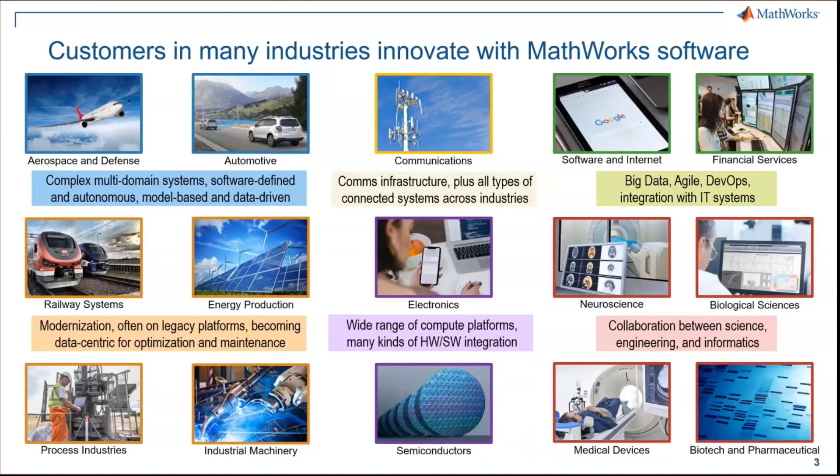At MathWorks, we have a lot of experience helping customers derive business value from innovations in engineering and science, and this allows us to share insights, best practices, and trends with customers across many industries. For example, reducing carbon emissions is driving innovation in various industries, and it's a key focus of the energy industries as well. Companies are challenged to conform to regulatory and competitive pressures while achieving both top line and bottom line growth, and it's a challenge the oil and gas industry recognizes as well.

So that's a high level challenge. But what about the challenges at an operational level, or at a plant level, or at an engineering level?

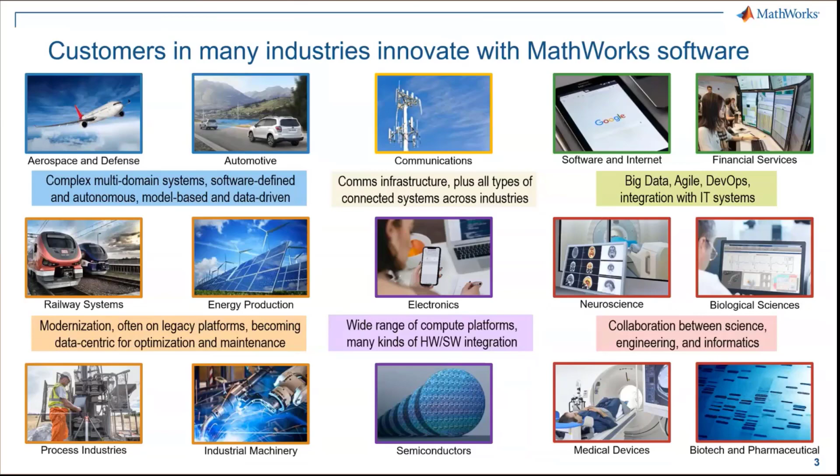That's where digital twins come in. With digital twins, the promise is you can make your operational system smart and connected, and with operational data, you can inform operations to do things better. These are all possible, and things being done today. The applications and benefits you hear of digital twins are things like granting visibility into operations, allowing predictive maintenance, simulating various scenarios, doing what-if studies, and optimizing your operations.

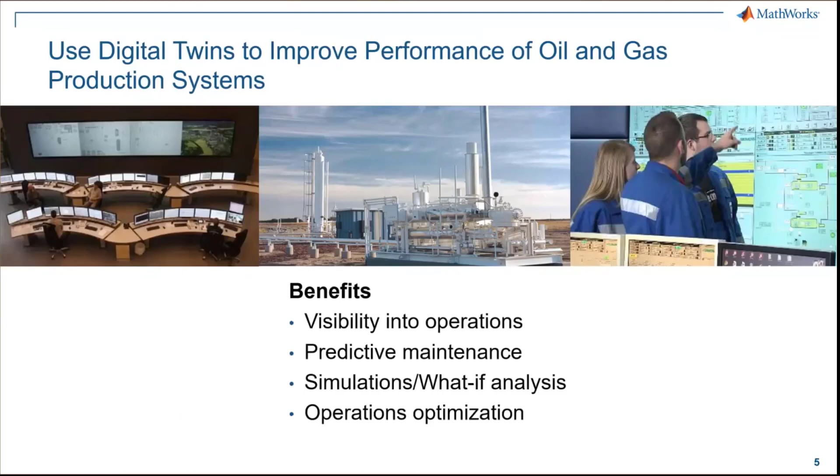Here's an example of one such production process or plant process. It's common to have traces of plant output, like sensors, at sensor locations throughout the plant, but leveraging that information to understand the overall process can be a bit challenging. This is where statistical approaches like principal component analysis, or more recent AI-based techniques, have come in. They allow you to better understand the plant, better understand the context, and analyze system level KPIs. These approaches are well suited to address things like a drift in the process and identify good batches versus bad batches.

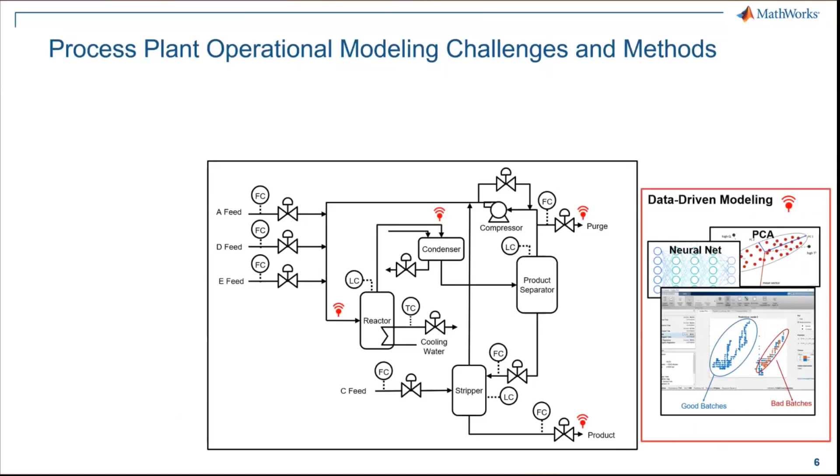At the same time, you also have unit level operations that can be modeled with first principles and the laws of physics. These can be modeled with concepts like energy or mass balance, and are often modeled with process simulators. And now these can begin to be combined to model the overall system process. The more powerful approach is being able to combine both these techniques to get virtual representations of the complete process and how it impacts the KPIs. So let's talk about how these models can be used for the overall benefit.

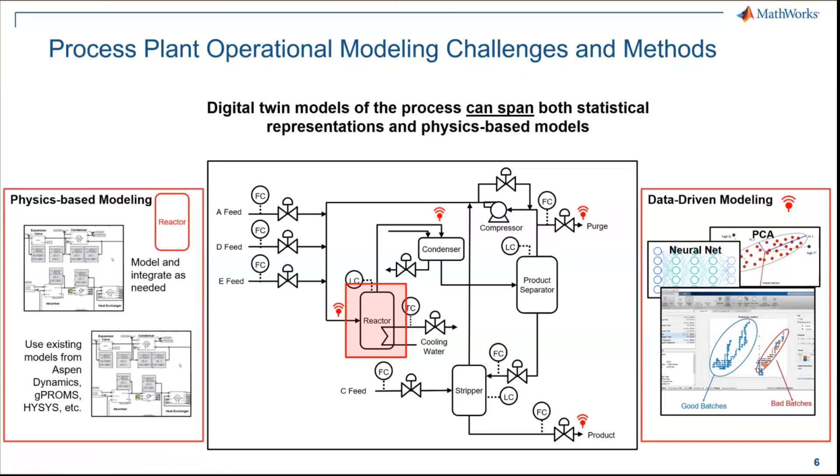And that will come in the later part of the presentation. But how do you go about building these digital twins?

For instance, for system operators, they have control on how the system resources are used, and they're able to see operational data coming off of the system. This data is the first thing that can be used to model what is deemed useful. If appropriate, then physical domains and conservation laws can be applied, and this can be augmented to create other digital twin models. In general, these can be combined to create hybrid digital twins of the process.

Like how a system is a mixture of components, that's how models are also created. They're a mixture of physics-based techniques and data-driven techniques. Overall domain knowledge is useful to make sure that the right models are created and brought together.

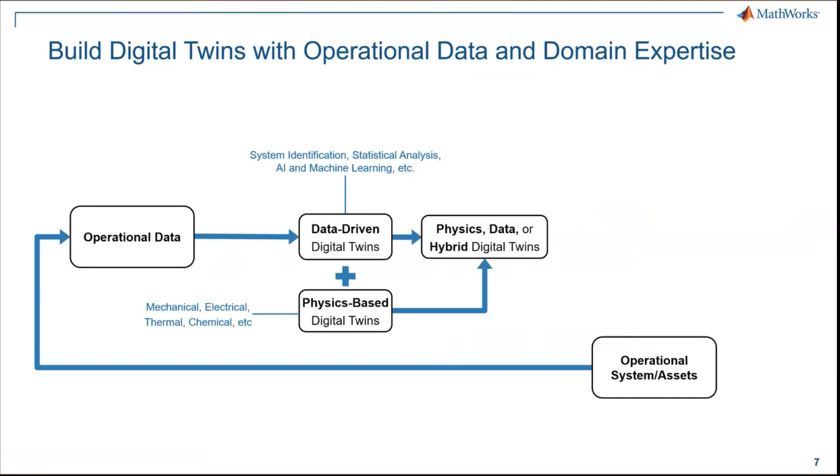And then once it is modeled, it needs to be eventually deployed or acted upon. The ultimate goal is things like operations optimization or predictive maintenance and fault detection and diagnostics.

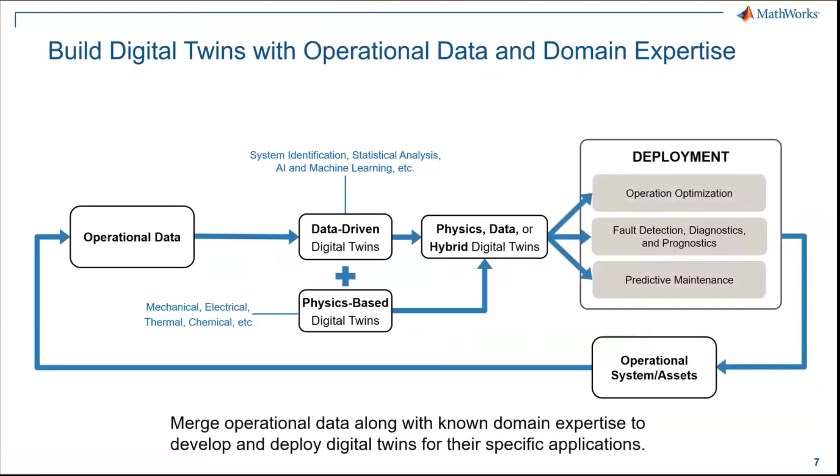MathWorks has existing customers and lots of customers that have used these digital twins, and these span multiple applications, multiple industries, and effectively these are various ways to get models in different levels of the system hierarchy.

And with that, let's get into the case study for today. Today's demo is actually inspired by one of our customers. RAG Austria is a European gas storage operator.

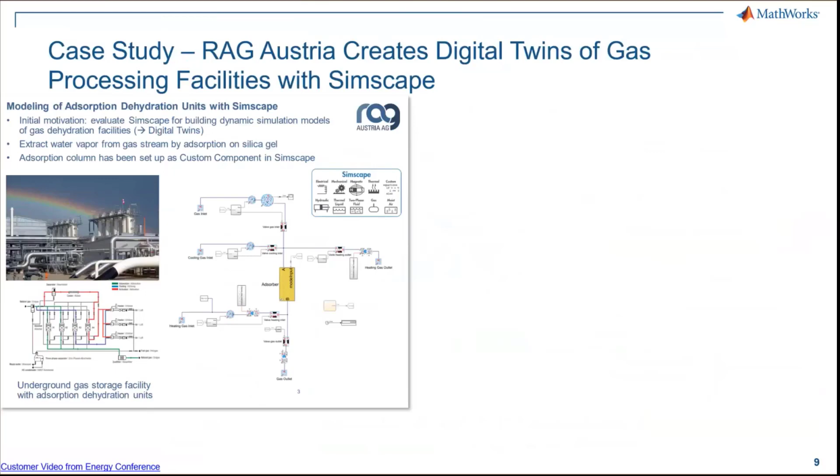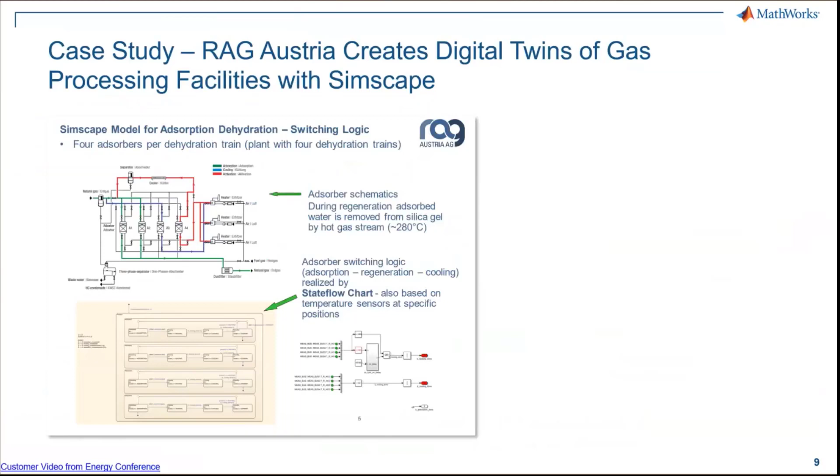They spoke at the MATLAB Energy conference last year about their project to build a digital twin of their adsorption dehydration units in Simscape. If you know adsorbers, then they have somewhat tricky control logic and supervisory control logic, which they were able to simulate in Stateflow. They compared this with plant data and optimized the plant accordingly, and that's how they created the digital twin.

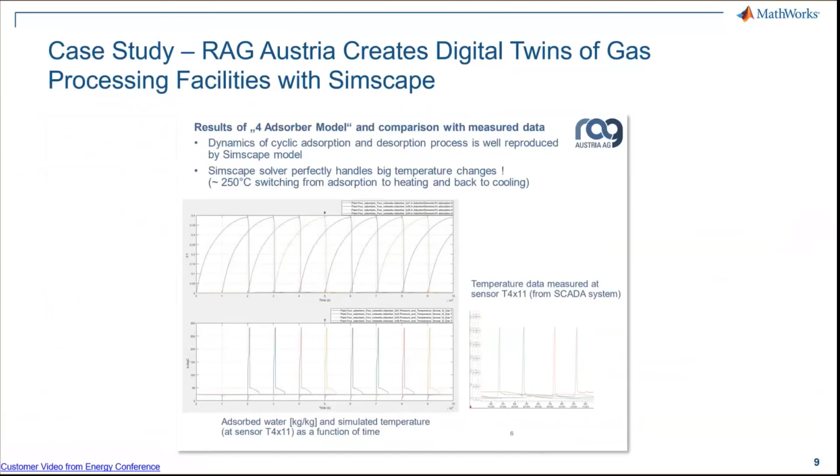They saw that solvers in Simscape were able to handle big changes in input parameters during the simulation. Then once the digital twin was created, it was used for simulations and studying the impact of various scenarios, like some of the ones that you see here.

Ultimately, the reason why they went with Simscape for this was the reasons outlined here: effectively being able to build custom unit operations, libraries, and solvers, and various optimization capabilities.

With that, I'll transfer it over to Eva, who will take a deep dive into what Simscape is and how you can use it to create digital twins of your process, and will walk you through the demo itself.

So what Samvid introduced was sort of the case study we did, which is also what the RAG project was based on. We initially did sort of a proof of concept for them, and some of the work will be presented here. It's not specific to the customer, but a more general proof of concept of how we implemented adsorption equations, combined it with our Simscape libraries to build a digital twin of this application, but this could apply to similar applications as well.

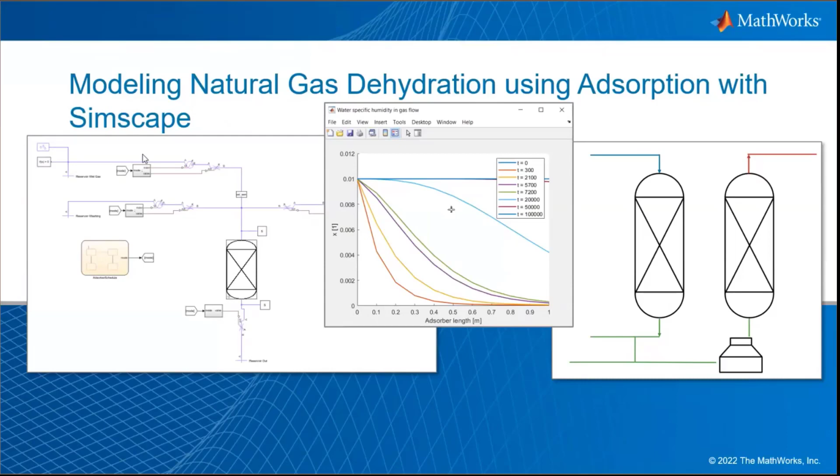As Samvid already introduced, this was done using existing Simscape libraries plus some customized components and customized libraries for the adsorption process. So in the next 20 to 30 minutes or so, I'd like to give an overview of what we did and how this can be achieved using Simscape and some additional tools.

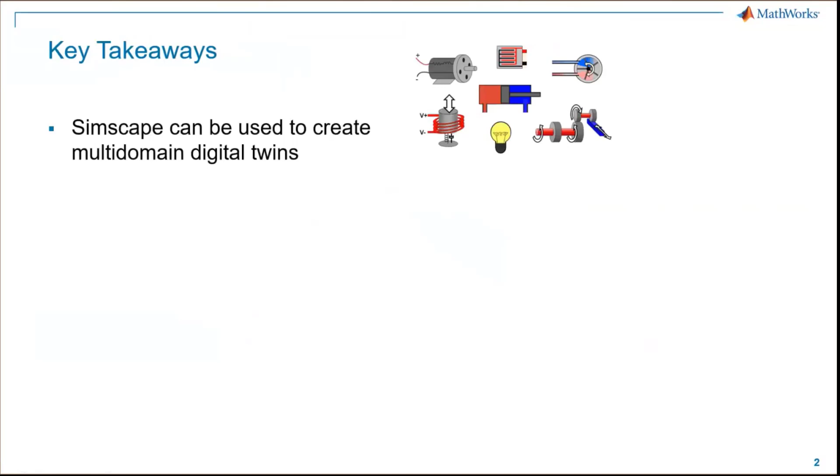First of all, how Simscape overall can be used to create multi-domain digital twins or multi-domain models. How modeling plant and controller, or plant and switching logic in this case, in one single environment enables things like system level optimization, how you can calibrate models using measurement data, for example doing a parameter estimation study, and that it integrates well with MATLAB and Simulink, for example for getting data into the model, for post-processing via MATLAB, and Simulink, for example, for control design tasks.

So the demonstration for today is this model. It has sort of a similar look as you just saw in the screenshots with Samvid, but again this is a proof of concept of how this can be done. So this model—I'm actually going to switch to MATLAB for that, so you can have a first look at the model. Here you can see the same model within MATLAB.

I already ran the model just before this meeting. It takes 2 minutes or so to run. The cycle I ran through is something like a couple of days, which again takes about 2 or 3 minutes to run. So I already ran it.

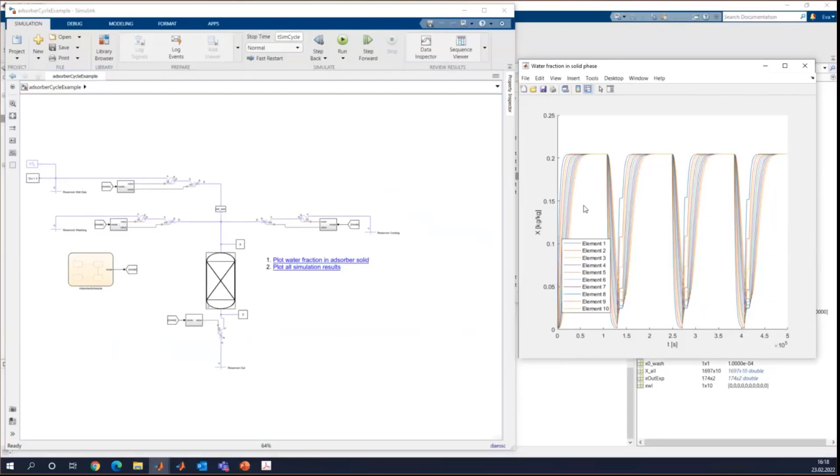And what we can see here in the results plot is the loading of the silica beads in the adsorption column for different elements. Different elements here refer to different elements in the column. Underneath the hood, and we'll look into that later, this is discretized along the column length or height—discretized into 10 different elements. So we can see the spatial distribution as well as the time distribution.

So when we read here from element 1 to 10, the first line on top—we can maybe zoom in here a little bit.

So if we zoom in here, we can see from element 1 to element 10. In this case, it reads in the model from top to bottom. And zoom out again so we can see the whole view.

What we also see is that it cycles through different processes, drawing from different reservoirs. In the beginning, I'm trying to dehydrate the wet gas coming in. And once the silica beads are saturated, I'm switching to a regenerating mode, using hot gas to regenerate the adsorption column so it can be prepared for the dehydration process again.

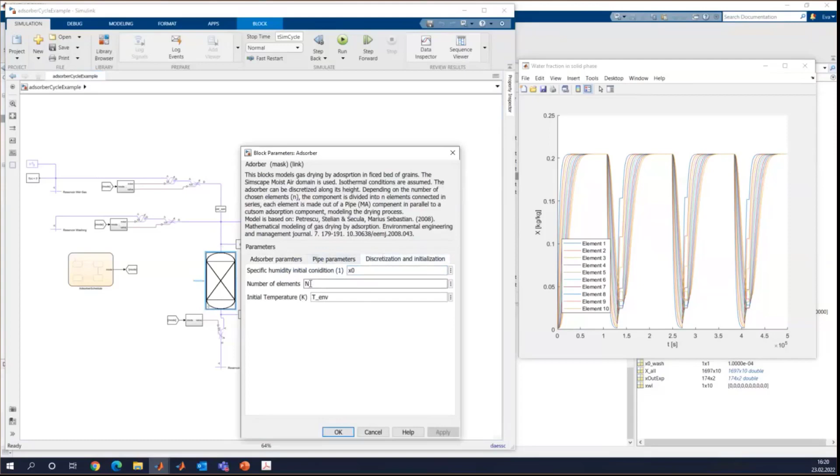And if I take a first look underneath the hood here, if I look at the adsorber column, I can already see I can provide some adsorber parameters, some discretization. Right now I'm using 10 elements, initial condition, temperature, and specific humidity as an initial condition. And from there, it starts to go through the process.

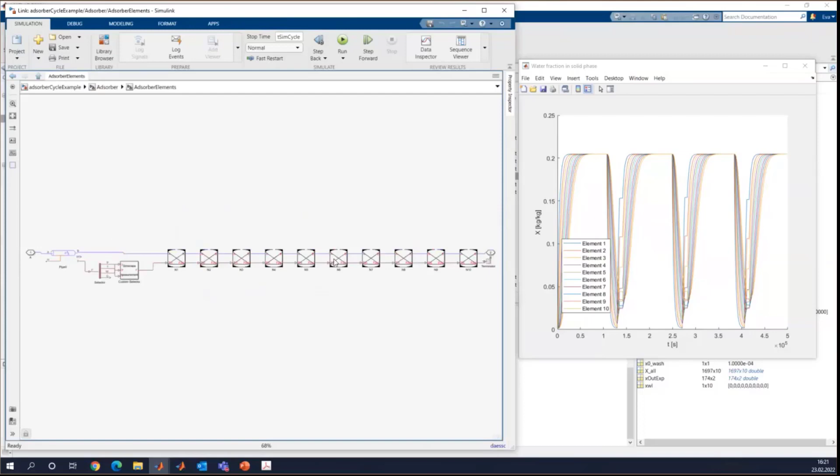And underneath the hood here, again more detail later, we'll see this has been divided up into, in this case, 10 different elements along the length of the adsorber, which perform the simulation, or inside those we can find the mathematical models for the adsorption process.

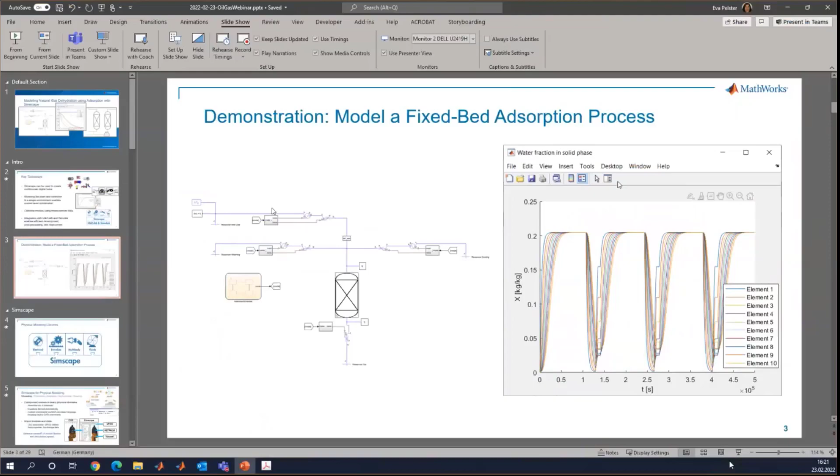But before I get back into detail here, I'm switching back to the presentation for a couple of minutes. So as already mentioned, this has been done using Simscape.

Simscape itself, for those of you who are not familiar with it, is a 1D physical modeling tool that is based on Simulink. By based, I mean you work within the Simulink environment and have additional libraries and technology, like solver technology, for example, for physical modeling. And it consists of a sort of foundation library, which is what we used here, plus custom components. There are optional add-on components used, for example, for electrical modeling, but also fluids modeling.

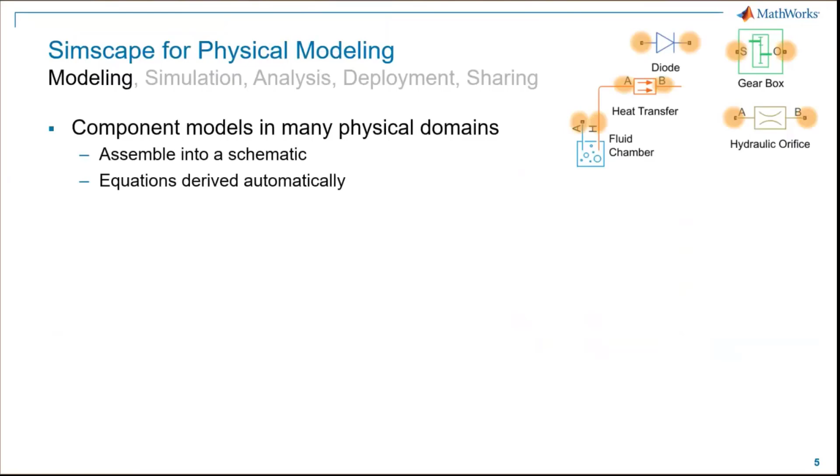And Simscape itself, if I go through a couple of slides right here, provides a sort of modeling style or modeling language that allows for acausal modeling. So what you will see here, you can see this couple of components right here.

You have blocks that represent physical components. They are not input-output based as Simulink components would be. So you don't directly implement the equations describing the system. You use components that ship with Simscape that can be parameterized. And this will be important later on because we used it for modeling the adsorption process.

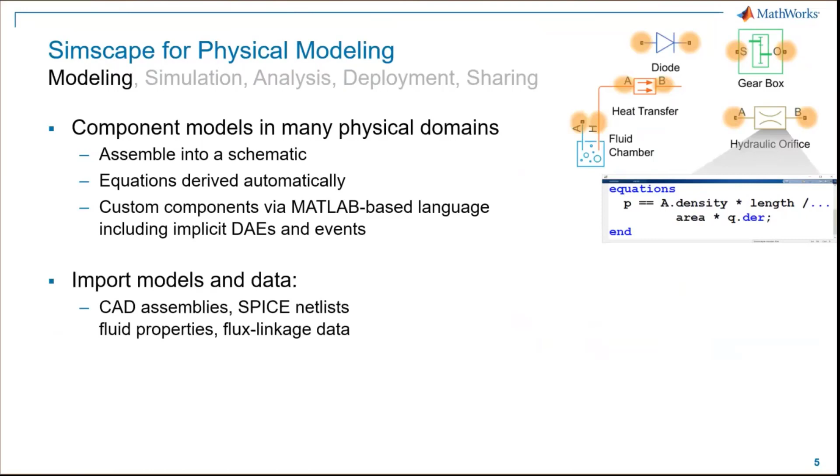We can create custom components via the Simscape language that allows me to create new components within the Simscape framework. And this is also something that will be important to us.

We can import different kinds of models depending on what domain you are in. So it could be, if you do multi-body modeling, importing CAD data, or, which will be more important for us, using databases like REFPROP to import fluid property data.

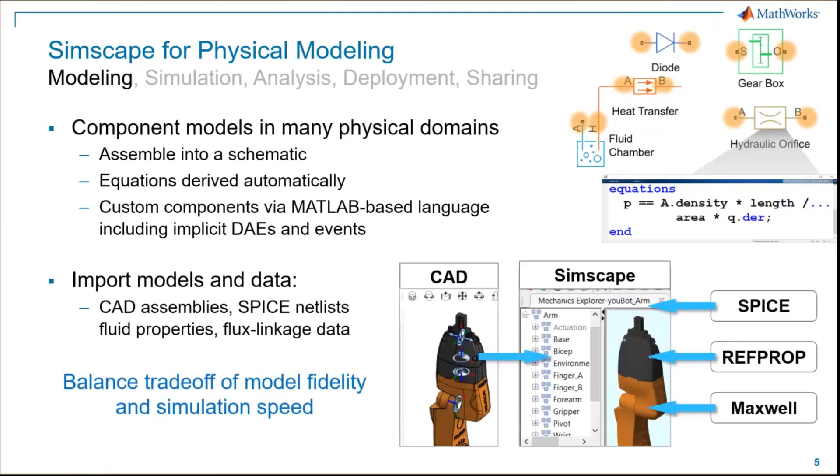In terms of simulation, I mentioned it builds on top of Simulink, but underneath the hood, we'll see more once I get back to the demonstration. The components themselves have equations already implemented, plus every domain, once I set up a physical network, has network equations that are being constructed in the background. So I don't have to take care of that. I have to take care of the components, how they're connected, and their parameterization.

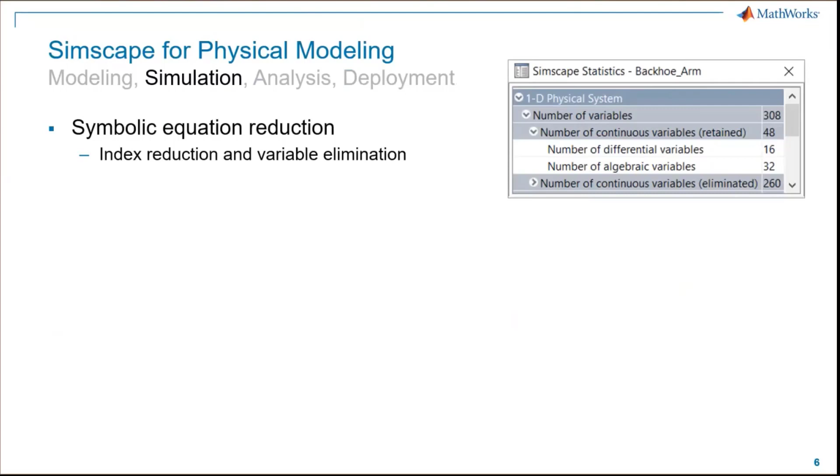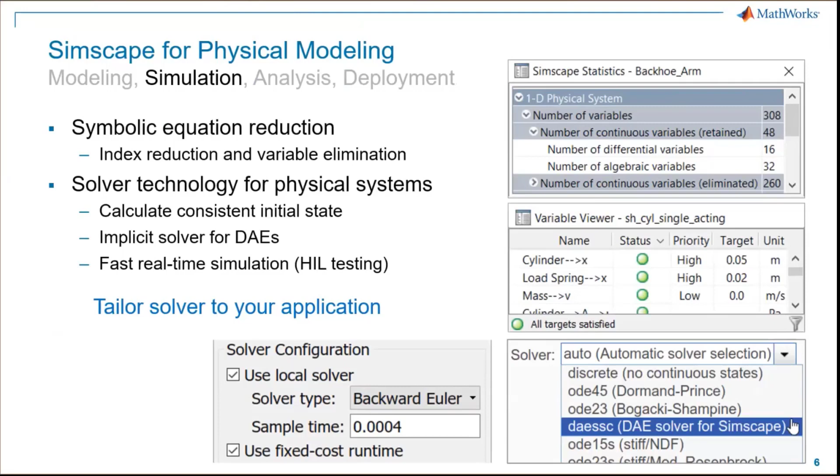So behind the scenes, once I hit run, what happens is a type of symbolic equation reduction. There will be some retained variables that the solver technology, which is kind of an add-on solver to the Simulink solver, will solve. And there are advanced settings on top of that, depending if you're using a fixed step or variable step solver, that you can set specifically for Simscape.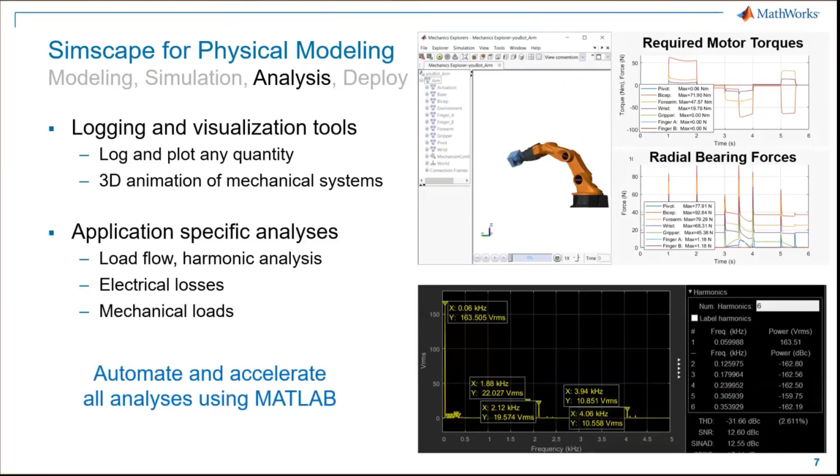And analysis tools, for those of you who use MATLAB and Simulink, some might already be familiar to you. There are specific tools like the one we see right here, which is multi-body animation. If you do multi-body modeling, there are specific Simscape logging possibilities or additional logging options we can take. And some specific tools, but you can always use MATLAB and Simulink capabilities that are also available, especially for post-processing or pre-processing.

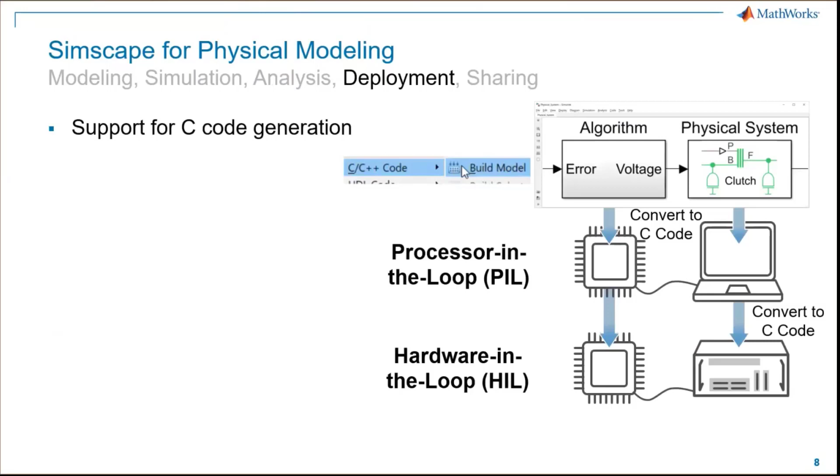In terms of deployment, there are some similarities to what you might be familiar with if you're a Simulink user. We do support C code generation for Simscape networks or Simscape components, which becomes specifically important for hardware-in-the-loop simulations. So if you don't have the actual physical prototype because it's not there yet, or it might be too expensive or too dangerous to test, you can deploy your system or physical network on real-time hardware and perform a hardware-in-the-loop simulation. This is one application where C code generation from Simscape might come in handy.

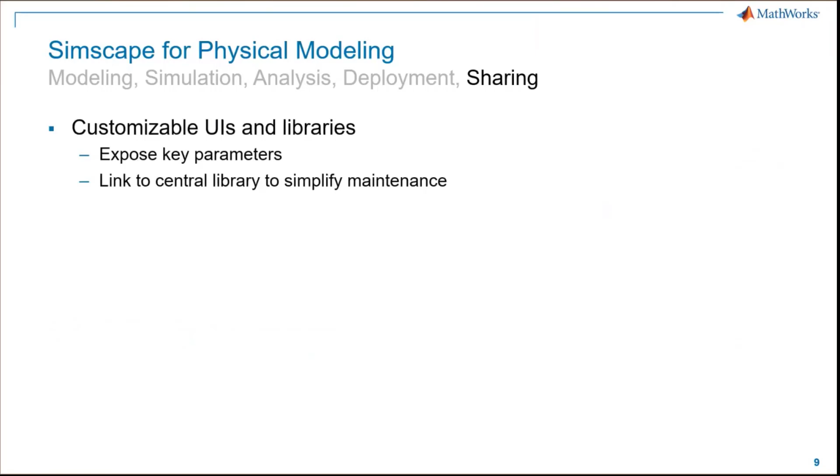This typically exposes just parameters you might want users to change, without really changing the structure of the component or of the model. And if you want to go one step further, you can use model protection to pass along a protected model, to avoid others making changes or being able to look underneath the component, for example if you want to protect your IP.

Finally, there's a so-called sharing mode, meaning if you use Simscape add-ons like Simscape Fluids or Simscape Electrical, you should be able to share the models with other Simscape users even if they don't have access to Simscape Fluids. So you might have one developer who creates an advanced Simscape model using add-on libraries, and others who are only model users, integrating them for simulation purposes and changing a couple of parameters.

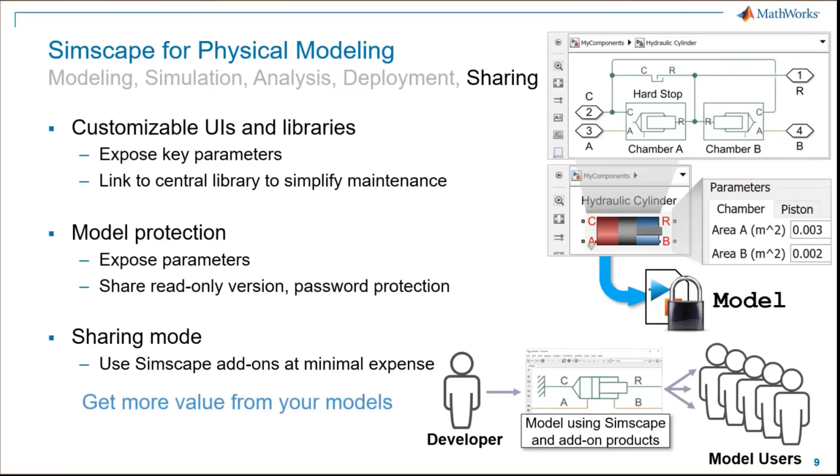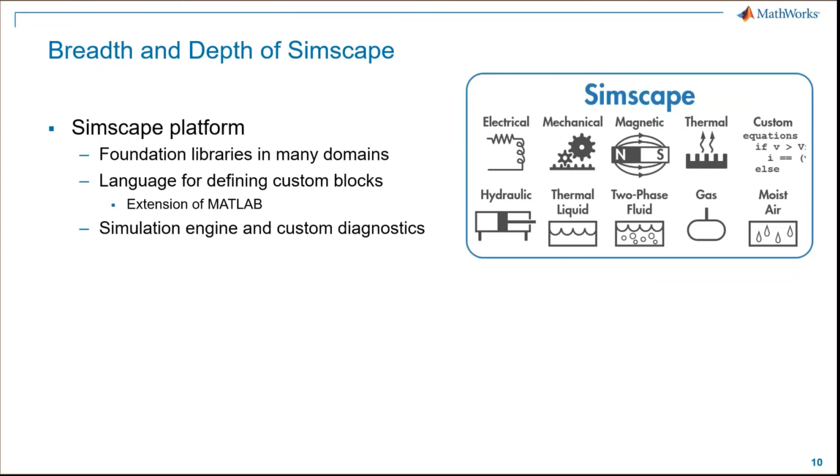As long as they don't change anything structurally about the model, they can reuse it. Okay, so to wrap this part up, the Simscape platform itself has a foundation library. I'll get back to the demonstration in a minute. There's a variety of domains in there - you can see them on the right-hand side, like electrical, moist air, thermal domain, with the capability of creating your own custom blocks. On top of that, we have add-on libraries, which typically extend the library by dozens of components, usually more advanced or more complex, but they support the entire workflow we've just seen as well.

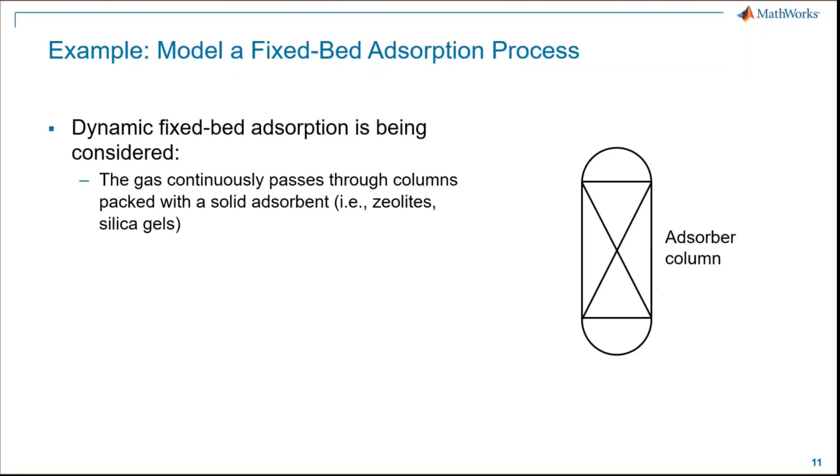So going back to our example, we started creating this model maybe around two years ago, and the question was, can we model fixed bed adsorption using the existing Simscape libraries? So what we want to look at is dynamic fixed bed adsorption - we have a wet gas continuously passing through columns packed with an adsorbent, like silica gels or zeolites.

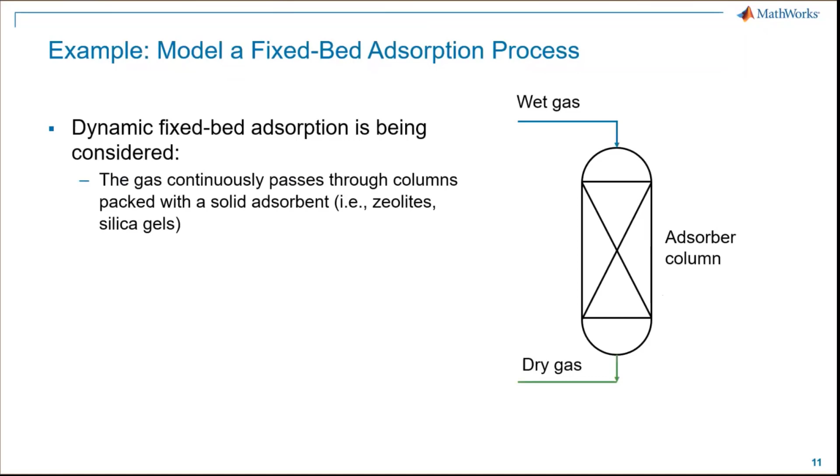Which should dry or dehydrate the wet gas, so ideally at the end of it we have dry gas coming out. And to enhance this, what typically happens at some point is the adsorbent will saturate, meaning the adsorption columns will switch into a regenerating or heating mode to wash out the solids and make them available for dehydration again. So we have something, as we just saw in the example, that can be continuously cycled through, commanded by some scheduling logic, for example in Stateflow.

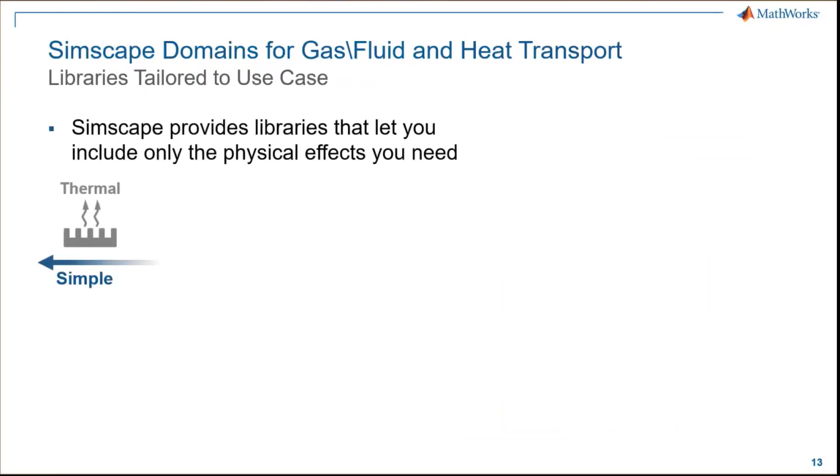So that was the question at hand, and what we had available were some existing libraries and some existing domains we could use. So if we think about what libraries are available that account for gas, fluid transport, and heat transport, there are a couple available in the foundation library. This is sorted from left to right, from simple to more complex - more complex typically meaning more effects are being considered, but also probably more equations will be created once I hit run.

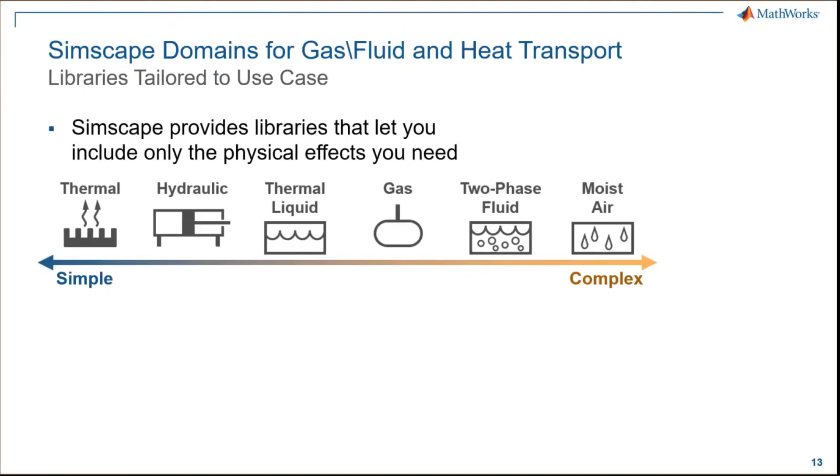The thermal domain typically doesn't consider gas and fluid transport - just, unless you customize it, a constant heat transfer coefficient. Then we have the thermal liquid domain, which adds thermal effects. We can model a gas domain, two-phase fluid, and for a couple of releases now we've also had the moist air domain. Technically, there are always options to create a customized domain, which is what we did in the end, or what the case study somewhat presented. But for the present example, we are actually using foundation library capabilities.

So what we considered using, or what the questions were, we need a domain that accounts for a non-isothermal gas flow that can track humidity and maybe optionally track another trace gas present in the natural gas we want to dry. So what we used in this context was the moist air domain.

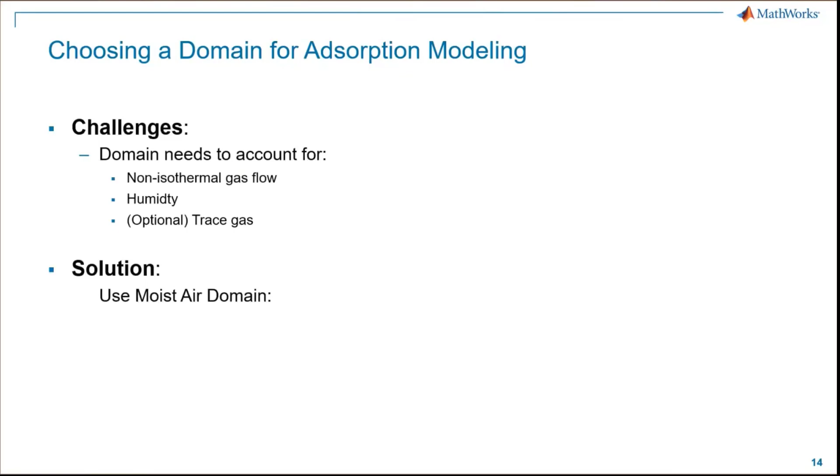The moist air domain comes with regular Simscape, with Simscape Foundation library. It accounts for dry air, so it has up to three components: dry air, which is what we took as the natural gas component, water vapor, and an optional trace gas component as well, which we didn't use here.

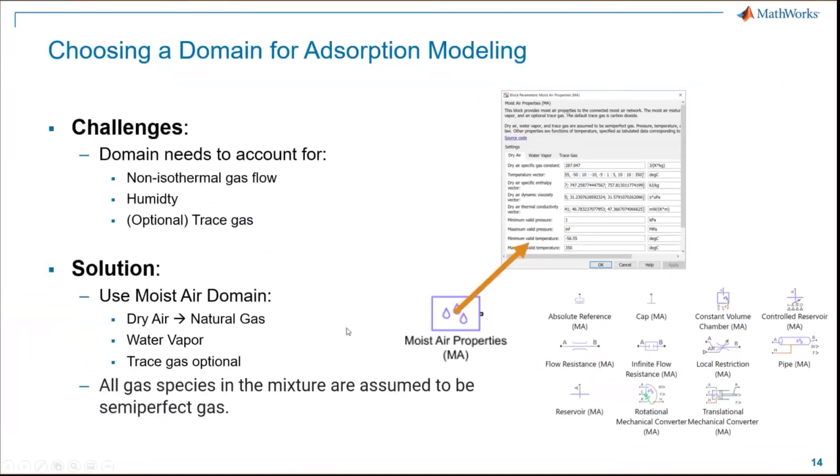So going back to the model, I'm switching back to a different version of the model. This is the version that cycles through, so we have a Stateflow component here that cycles through the different modes: drying, regenerating, cooling, standby, and then drying again.

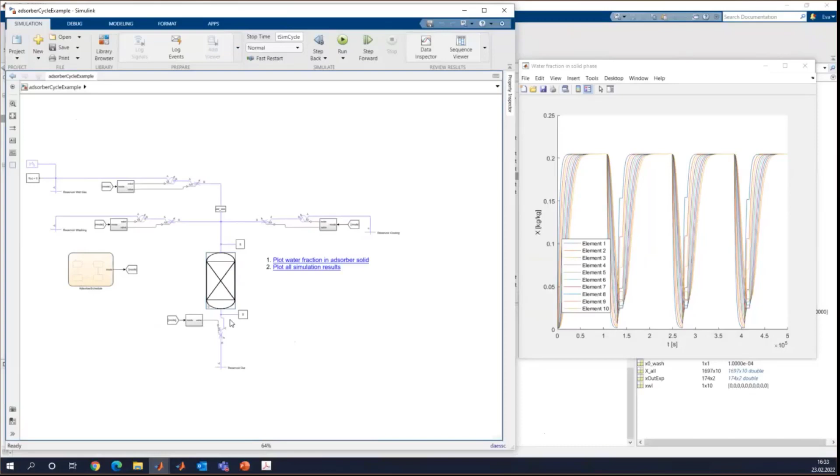Each column, so we are just using one column here, but that is going to be extended to be using more columns. We have just to look at just one drying process to be able to validate the data. This is just using cycling through, or just simulating the drying process until the beads are saturated.

And we have a mixture here. So if I go to my actual library, you can see what I used here was Simscape, which is based on Simulink. You can see me using the Simulink environment here. And we are using some default components.

For example, here I have something simulating or mimicking a pump. I have a mass flow rate source. This is drawing from a reservoir, this reservoir. So when I look at the Simscape component, how it's defined, this reservoir, I can define its current pressure, its current temperature, a specific humidity value.

The humidity can be defined in different ways using mole fraction, relative humidity. I'm using specific humidity here. So I can apply my parameters as I would with a Simulink block. Same way I'm doing it with a Simscape block here.

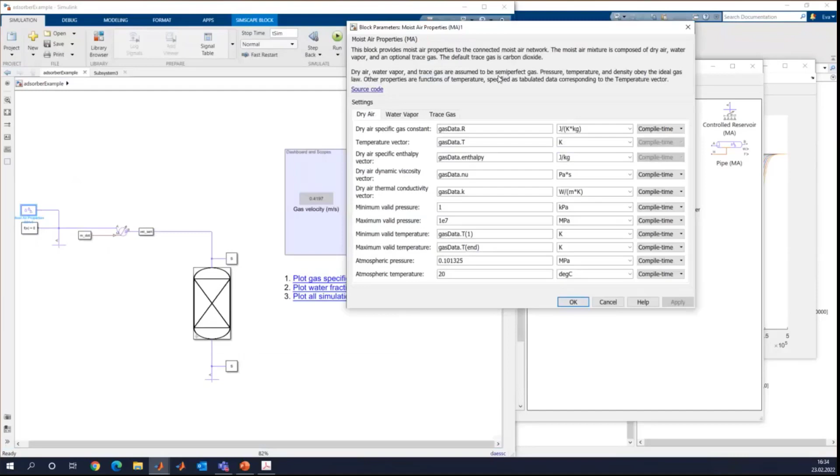And I'm also using a properties block. So which fluid properties are actually being carried through the system is defined by this block right here. This makes all properties available to the entire model. So I have parameterized it here.

My natural gas data, water vapor data, and trace gas, I have supplied values here, but I actually have set all the trace gases to be mole fraction of 0, so I don't really account for it right here.

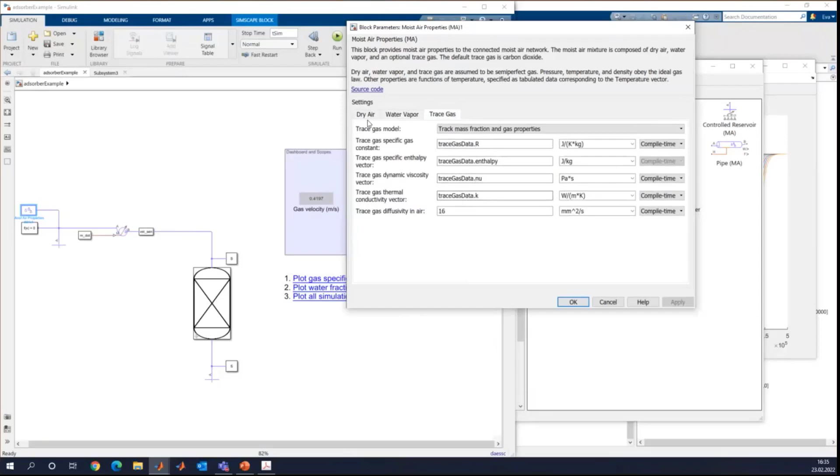This data, we don't supply default data, but the question that other customers often ask is if you have some kind of support or how to get my data from.

If they have existing database access, if they have their own data already, it usually can be done via MATLAB, just loading it in MATLAB if you have it in an Excel file, for example, and make it available to Simulink and the Simscape model.

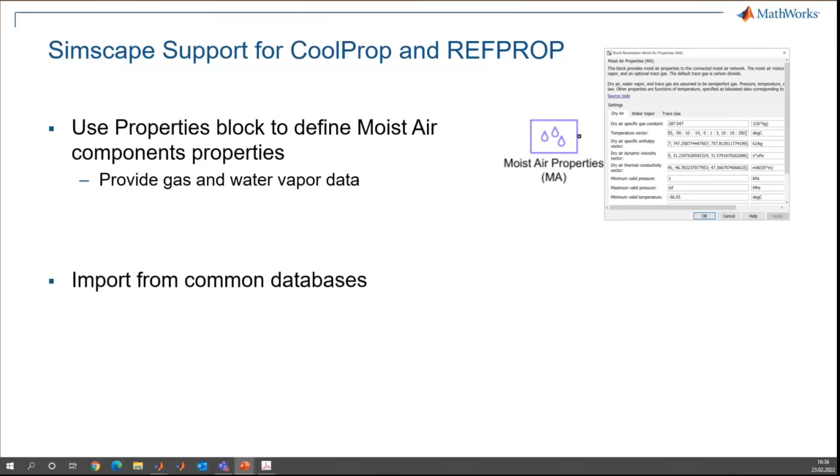So the way to do it is just to use that properties block I've just shown you to define the data, provide, in our case, gas and water vapor data. Or what we did here is import from RefProp.

So we do have RefProp available, meaning, and we have wrappers in MATLAB that access. Some of them can be provided from us. Some of them are already in our tools to some degree, but we do have wrappers sort of for MATLAB. That means I can just, for certain conditions, load my data.

And it can be as simple as the line we see on the bottom here, meaning I'm calling the refprop m interface, or refprop MATLAB, I think is the name of the function, and I can call a specific property at a pressure and temperature value, for example, for a given substance that is in the RefProp database.

And this can be done for a scalar value, but also we need it here like in temperature dependent form. So I can define a temperature vector, and for this temperature vector, catch my data from RefProp, which is what I used in my case.

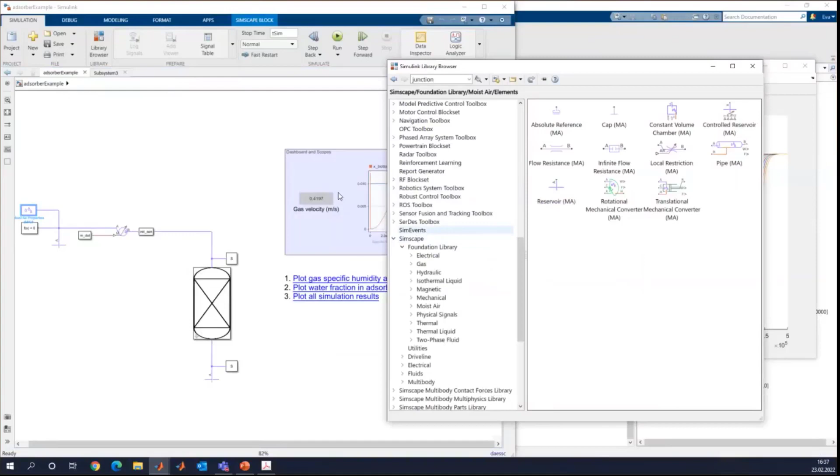So going back to my example, this is how we set up the environment, but the question is how do I actually create an adsorption model? Because if you look in the library, there's obviously no block called adsorption column. So we used some publicly available papers and did research on common mathematical adsorption models, and decided to create our own components that account for the adsorption process.

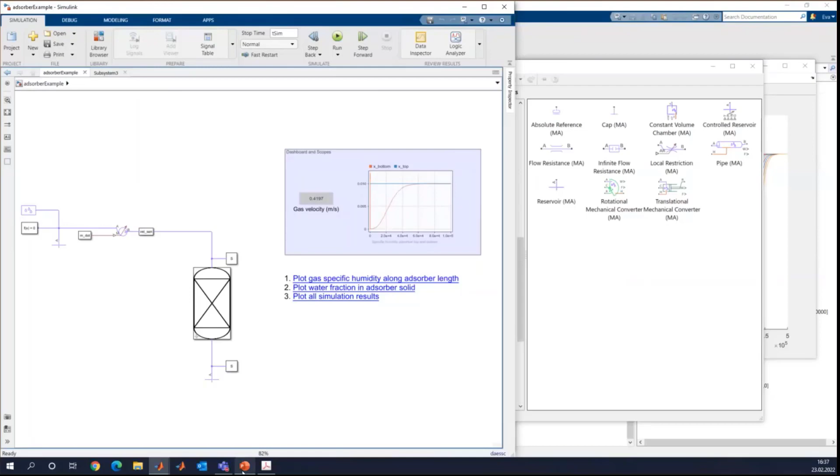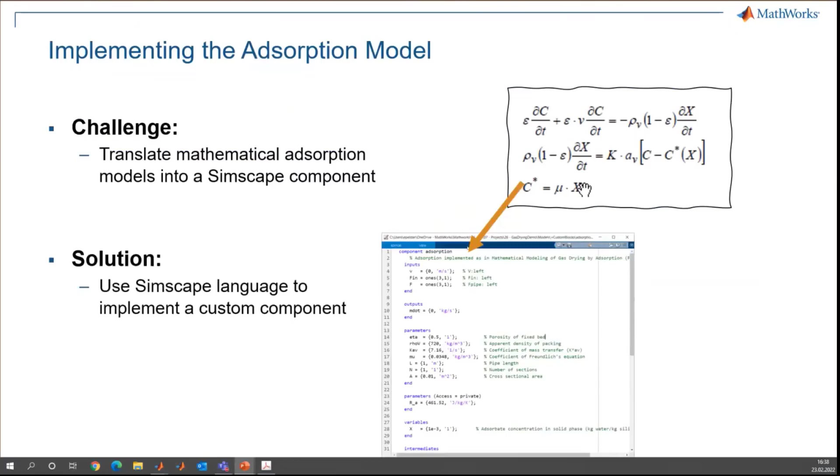We wanted to put this into a Simscape component. The idea is we have Simscape language at our hands that's available with Simscape to create our own custom components in any domain that's available. So the idea was to put this into one file, and it can be as easy as just one file, depending on how you structure it. So what we did here was actually translate this into an SSC file.

SSC refers to the Simscape language files. For MATLAB users, you'll see some similarities to MATLAB code, but there are some specifics for Simscape language in there as well.

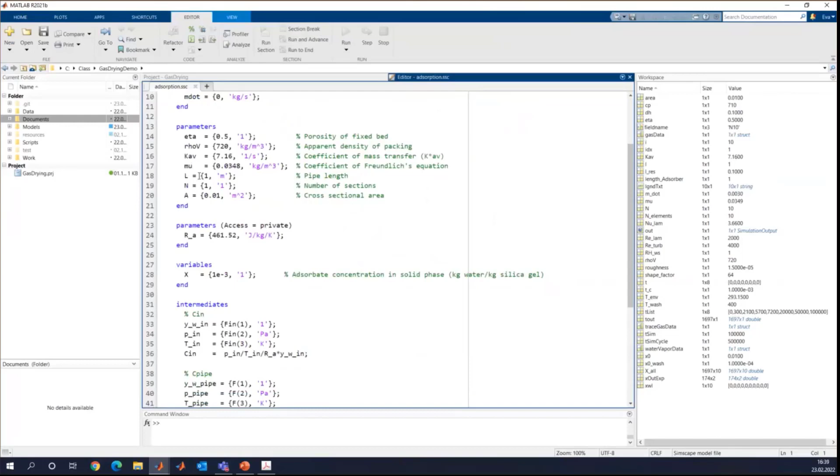Just to do a quick browse through it: the way we do it, you set up physical nodes, you can set up inputs and outputs. The parameters refer to the interface - what parameters will the user provide for this model. We have some hidden parameters, and we have some internal variables. In our case, one of the internal variables is the actual adsorbate concentration in the solid phase, so kilogram water per kilogram silica, if you will.

And some intermediate calculations, but the heart of the component - what we see in the equation section - is where the model we've just seen on screen or in the paper is translated into a Simscape language equivalent.

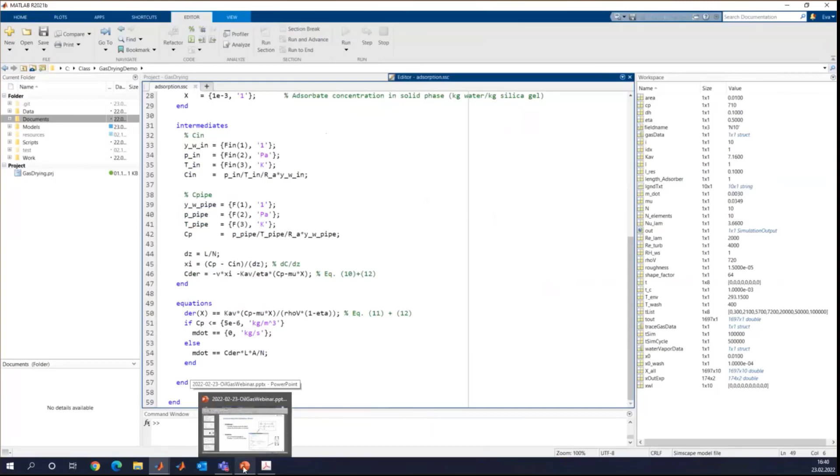So that was one part of it. The other side of it, going back to the slides for a minute, is once I have the Simscape component, how to set everything up. The Simscape language itself is available as soon as you have Simscape. It's a MATLAB-based language specifically for authoring Simscape components. Underneath the hood, it adheres to the same processes that the rest of the Simscape components do, meaning once I hit run, an equation system is automatically set up, reduced, and then iteratively calculated throughout the simulation.

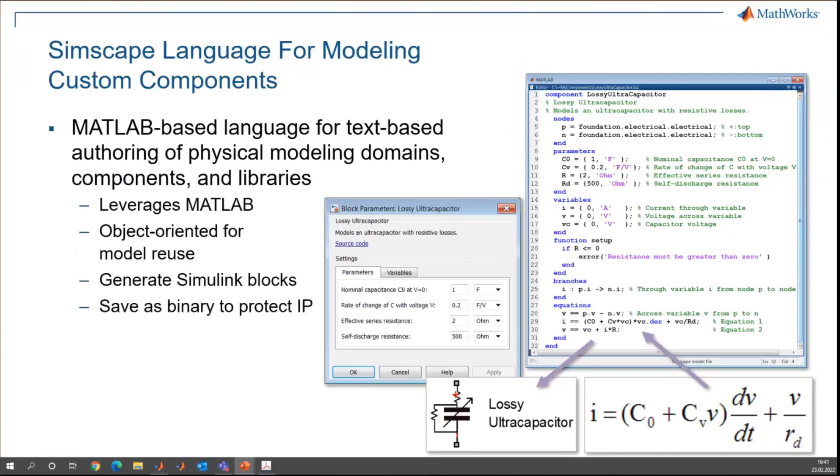It's just a way of translating something you have as a mathematical model into an acausal Simscape physical component. There are a couple of things you can do to create nice looking interfaces and easy to read blocks, so every user knows what to do with it, how to connect it, and ideally how to parameterize it. In the end, this could also optionally be added to your Simscape library browser if you want. So once we have that, we have a basic adsorption component available.

The idea is also, how can I now put this into an entire adsorption column model? First of all, we wanted to combine it with existing moist air components in the library and also be able to spatially discretize it, as we saw in the plot earlier, so we can see how it changes along the adsorber height.

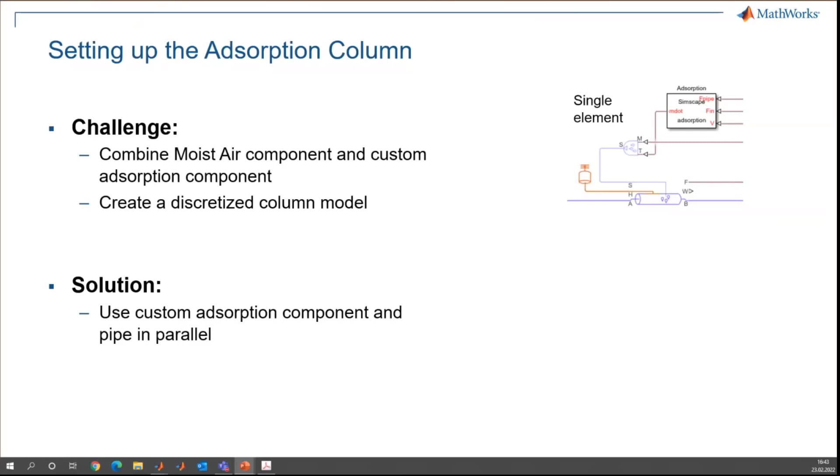So the adsorption model declares or commands the actual mass flow - plus or minus just means adding or removing moisture from the pipe. One pipe element is one slice out of the adsorber column, and the thermal mass block connected to it accounts for the heat capacity of one element of the adsorption column along its height. So this is one single element, and we could now manually copy and combine 5, 10, or 30 of these elements, or we can use automation. So we did.

We created a custom library element where we have an interface that can say 5 elements, 10 elements, 15 elements, and depending on the elements, automatically—we have MATLAB commands that can automatically build these models.

So if I go back to the basic model right here, I can look underneath the hood and see right now it's made out of, what is it, 10 elements. If I change this, let me overwrite this 10 and just type in 5.

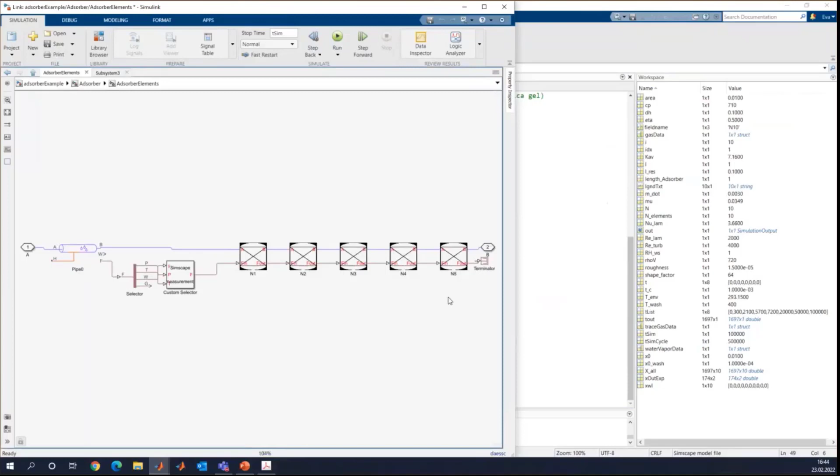So what will happen if I look underneath the hood here, this will be reduced to only contain 5 elements. So the volume and the length is divided differently—each element will be longer, but the adsorber parameters will be the same.

Okay, let me switch it back and actually run it. I've only shown you the results so far of previously run examples, but I will actually run this as well here, so you can get a feeling of how long it takes.

The simulation time itself is now, again, I think around 50,000 or 100,000 seconds. And what we will also see is that compiling takes quite a bit of time. We can see now that it's still compiling.

Later I'll show you an example of how to do a parameter sweep or an optimization. And for an optimization, ideally, we don't want the model to keep on compiling because it repeatedly needs to simulate the model. So what I used later was, you can see it grayed out here.

There's a mode called fast restart mode. Once I put the model into fast restart mode, it will compile only once. As long as you don't make any structural changes to the model—meaning adding or removing blocks, connecting them differently—those will count as a structural change. But as long as you only do things like parameter changes, the model doesn't need to recompile.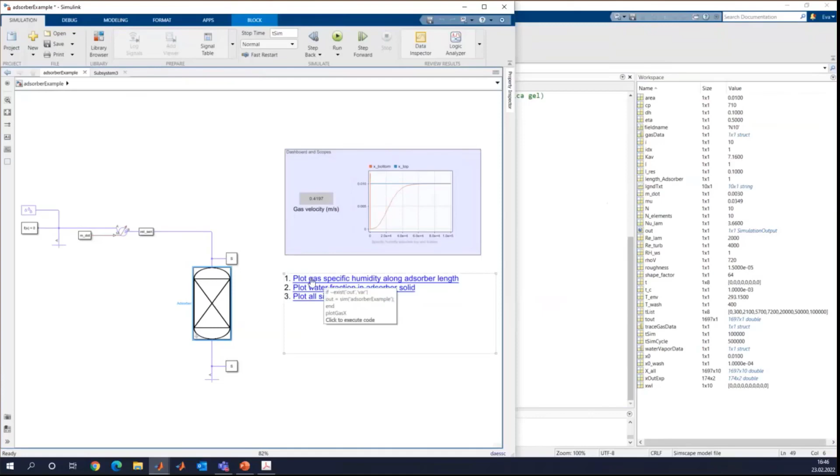I just plotted some initial results, just the specific humidity at top and bottom of the adsorber, but I've made, using MATLAB, some specific plots that give a little more insight. What we see right here is on the bottom, actually not the time axis, but the adsorber length—again, reading it from top to bottom. I can see along this length at different time steps the specific humidity.

So the top plot will be at 0, and then we can see it sort of slowly decreasing right here. So we can see the drying out process happening over time. You can read this sort of from—this is the initial step, and this is the initialization, so at t equals 0, and then you read it sort of from here to here.

We can see how the outlet gas sort of becomes—the specific humidity increases because the beads become saturated.

And we can do a similar plot for the water fraction in the adsorber solid. Again, we see it along its adsorber length, and we can see the actual saturation of the beads.

I have access to this data because I included Simscape logging. There's a feature that is turned on that is called Simscape logging, which means all variables are being logged throughout the simulation.

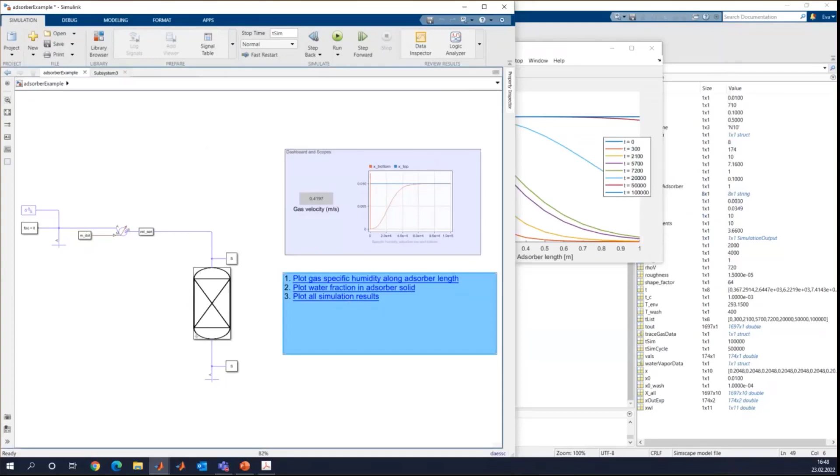So this represents again the structure of the physical model, and I can, for example, dig into the adsorber and see that there are actually up to 10 elements. For each of the elements I can actually look at how this has been set up, like trace different quantities, like the water fraction in the adsorber, and how over time it sort of slowly increases until the beads are saturated.

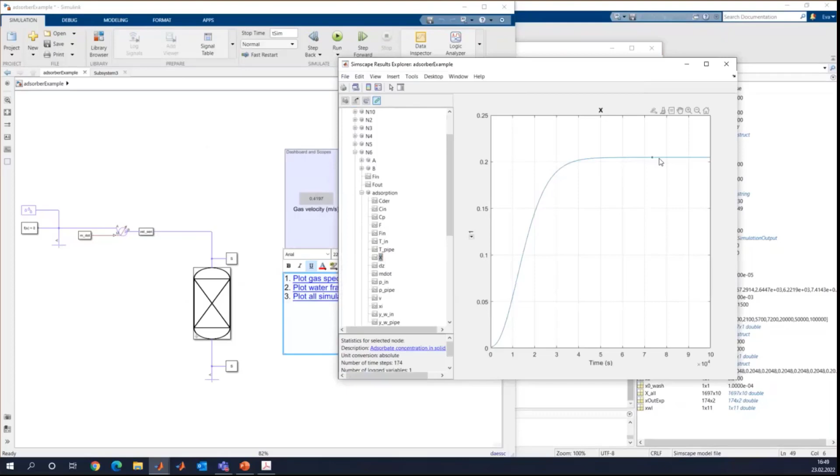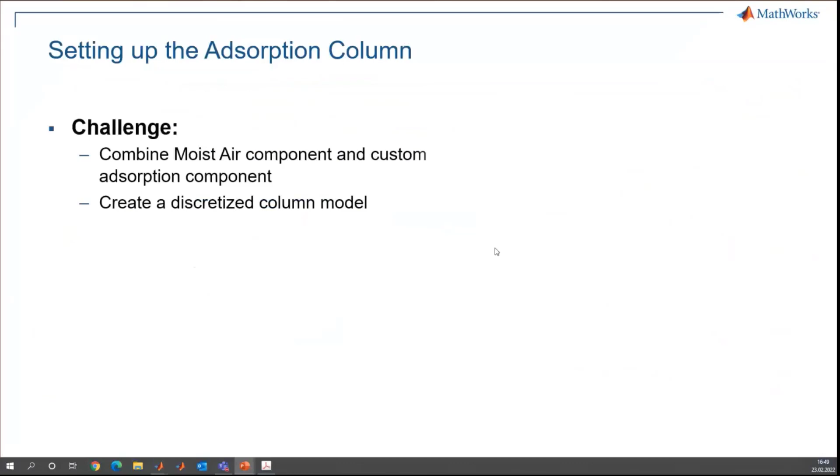Okay, so we've seen how we can create a single element and then discretize it to have the adsorber column made up out of up to a chosen number of elements.

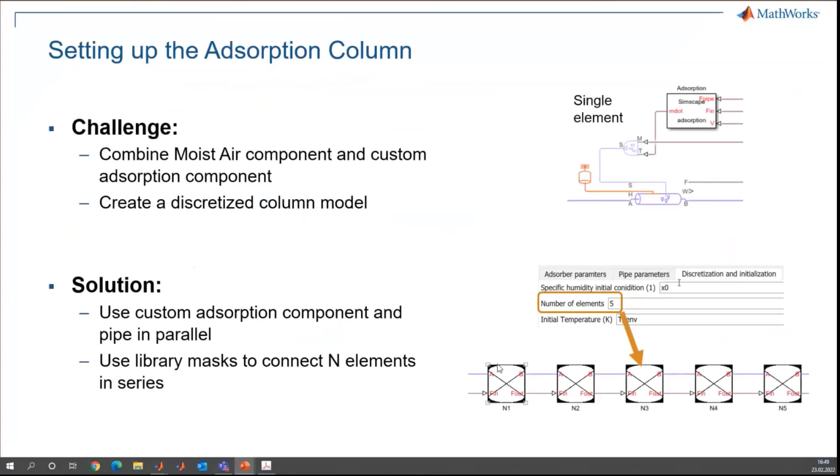An additional step could be, if you have experimental data at hand, to calibrate the models with it. That's a common question people have who are doing physical modeling independent of their industry applications. There are certain parameters not available, there are no data sheets for a specific component, it's not very well known or studied. Either way, there's an uncertainty to the parameters.

So typically the simulation does not match the real model behavior. We've reproduced it here, looking at some measured data and how an initial guess could look, and you choose the parameters that are uncertain.

So you have some initial guess for the parameters, and the idea is we have an interface for it called Simulink Design Optimization, which has a parameter estimation tool that allows me to automatically tune parameters. In the end, it ideally looks something like this: we have a tuned response that fits the measured response well, or well enough for whatever we are doing.

So the idea is, and this is where the mentioned fast restart comes in handy, if you set up something like this... sorry, that's the wrong example.

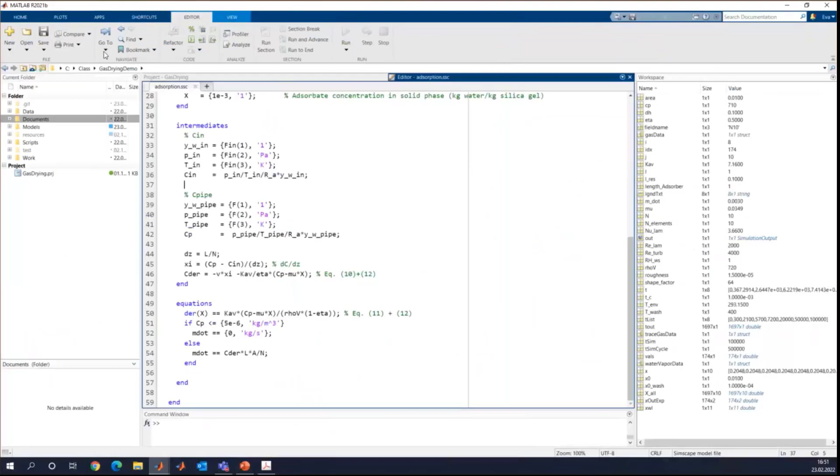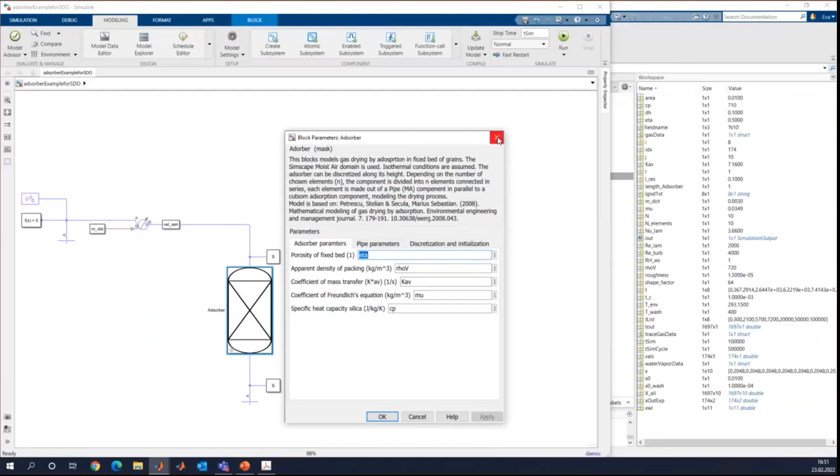We can set up an experiment, and typically in our case we've used our adsorber as an example. We have uncertainties in parameters. I specifically chose the Freundlich coefficient and the mass transfer coefficients to have some uncertainty. And we can set up a so-called experiment. I've already preloaded it in the parameter estimation tool.

So the way this works, you set up parameters to be tuned. If I look into the interface, I can set parameters to tune, maybe with a minimum and maximum value, which makes sense for some of them since certain values cannot be 0 or negative. But also, depending on how much you know about the parameter, it helps the optimization algorithm narrow down the optimization space.

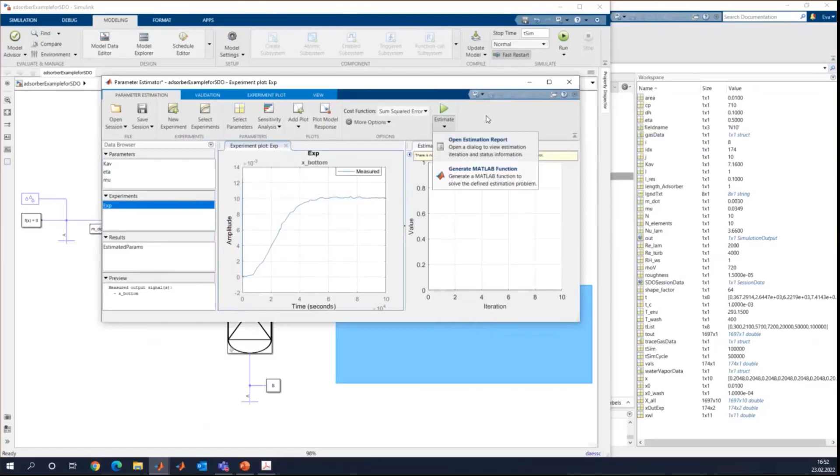You set up an experiment, meaning I need to load external data into it, to which I want to compare a certain output signal. So I'm comparing the output humidity of the adsorber to some given values. And once I hit estimate, this will start estimating the parameters - I'm not going to do this now because it will take a couple of minutes.

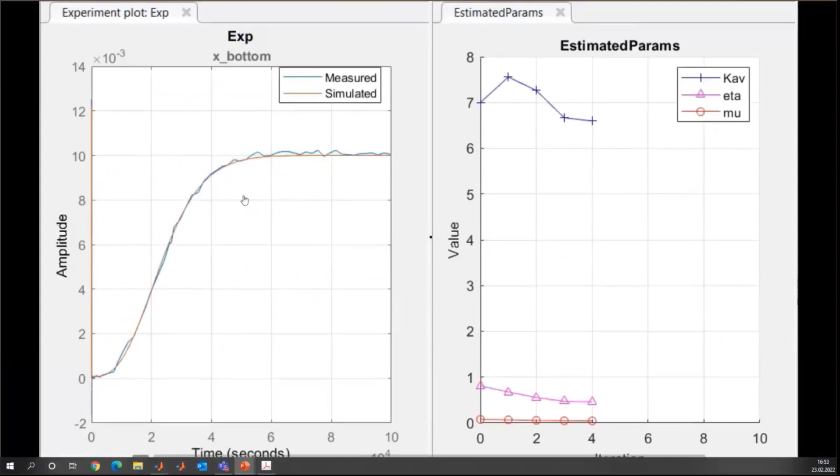I've made a sped-up video version of this that walks through it a bit quicker than it actually ran - it ran for about 5 or 10 minutes. But we can see that in the background, the model is continuously cycled through, and we can see how the simulated data tries to achieve a match with the experimental data, and how the parameters are being tuned along the way.

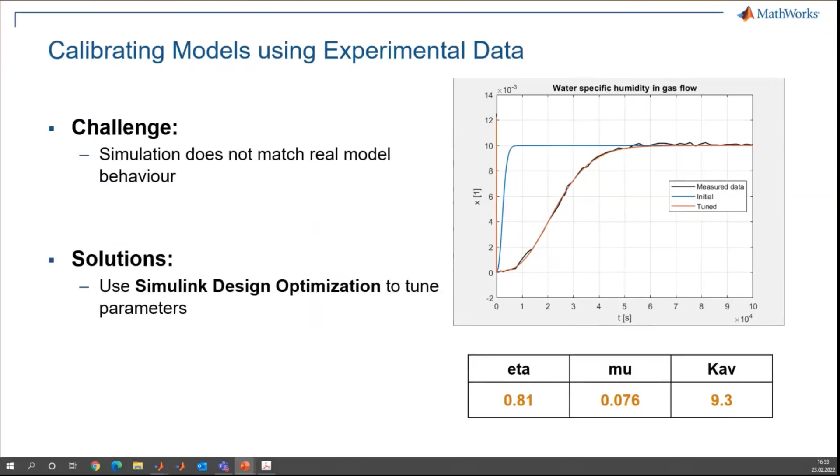Okay, so this was the final demonstration specific to this application. As a summary, we've looked into how Simscape can be used, in this case, to model gas processing plants, with a specific focus on how you can customize it. We have a shipping library, but there might be a need to customize certain things and how it plays together with what we already ship with the product.

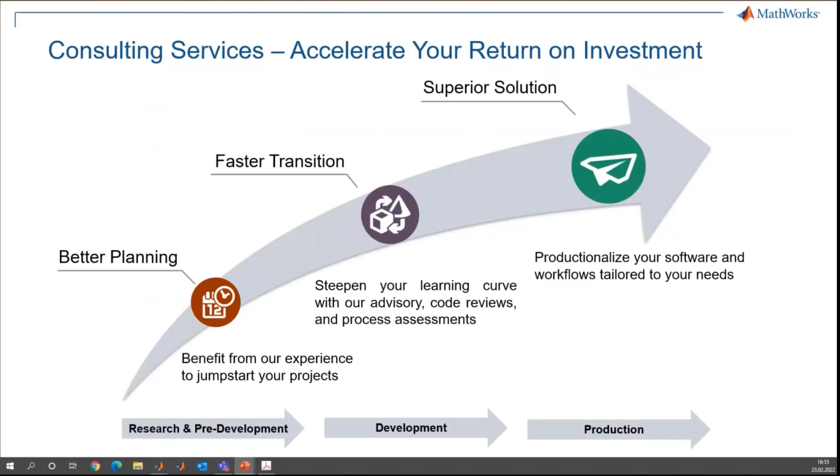A consulting project can have different flavors, starting from an initial workshop or jumpstart training to actually developing your process or project, or doing something like an actual workflow assessment from our side. And to wrap this up, there are also additional resources specific to the oil and gas and chemicals industry, on how MATLAB and Simulink can be used in that context for not only digital twins, but other types of applications.